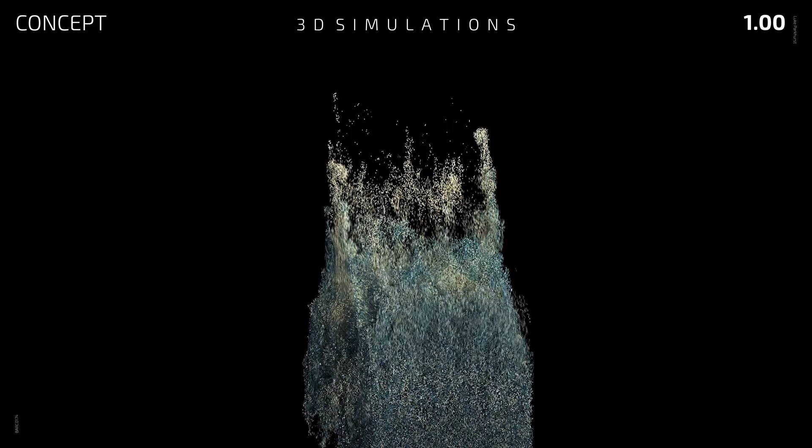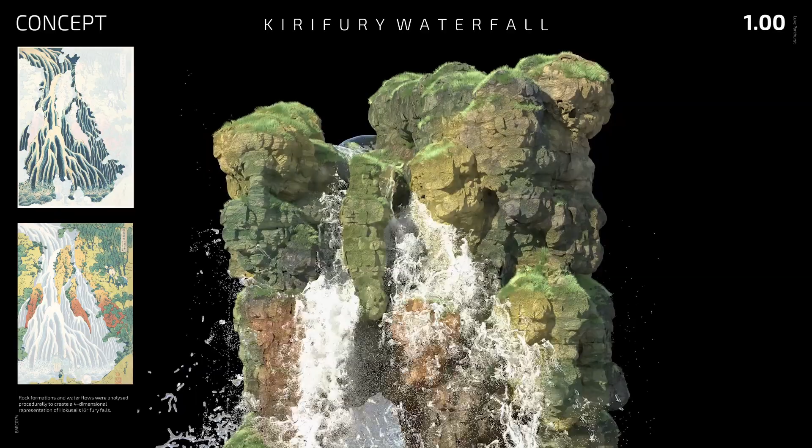The same parameters were used for the rock formations, with the addition of verticality and form. An algorithm was able to digitally grow rocks beneath the waterfalls. By combining the water simulations and rock growth, digital versions of the waterfalls could be created as 4-dimensional simulations with the addition of time, emulating Hokusai's experience during the creation of the paintings.

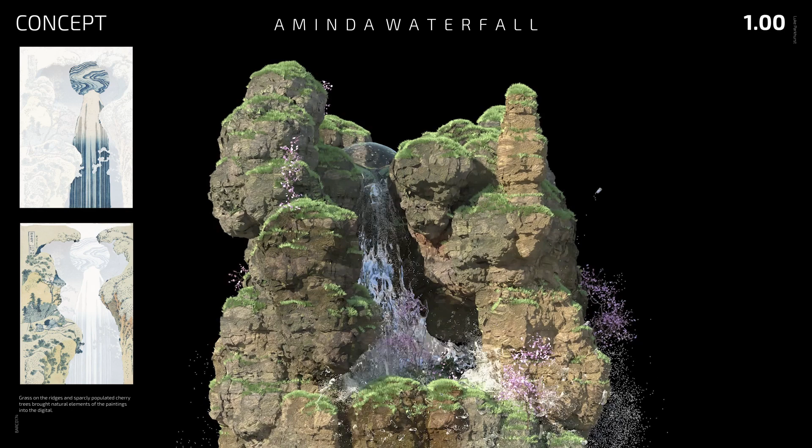Iterating through the different waterfalls produces unique procedural responses by the algorithms. In addition to this, each iteration exaggerates the amount of flora present in the scene until the final iteration, which is abstracted from the paintings. The creation of this virtual landscape mirrors Hokusai's expression through imagery and framing. Here, nature has been framed virtually.

In reality, the experience of nature produces a sense of calm, especially when forest bathing, the Japanese practice of spending time experiencing the sounds, smells, and visual stimulations of the forest. The project aims to address those addicted to the digital by introducing nature through the virtual frame and question whether it's possible to virtually forest bathe.

Research has shown that phytoncides, which are essential oils secreted into the air by forest flora and trees, are partially responsible for the calming effects of forest therapy. Phytoncides are plants' antimicrobial defense against pathogens, and when time is spent around phytoncide-emitting plants, they are inhaled and absorbed into the bloodstream, resulting in less cortisol in the blood, the hormone responsible for stress. One of the benefits of forest therapy is its rehabilitative uses for addictive tendencies.

In Tokyo, digital addiction is prevalent in internet cafés, partly because they provide a low-cost alternative to apartment living. However, spaces as small as 2 meters squared can worsen social isolation, depression, and anxiety. Access to the digital world has been typical of the internet cafe since its inception, allowing users to spend 24 hours a day in front of a monitor.

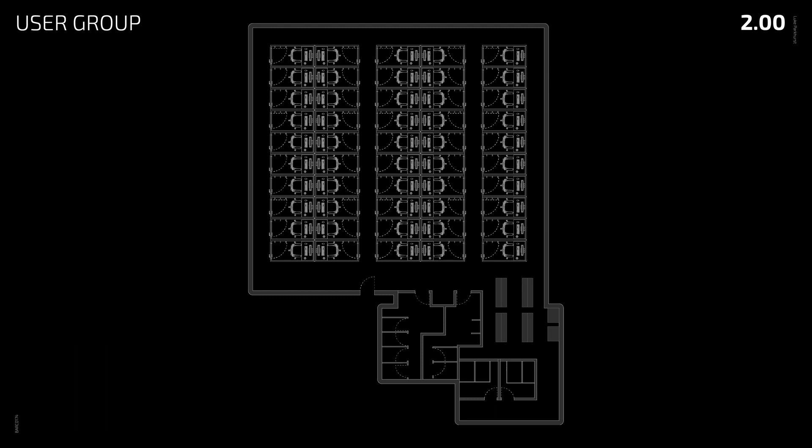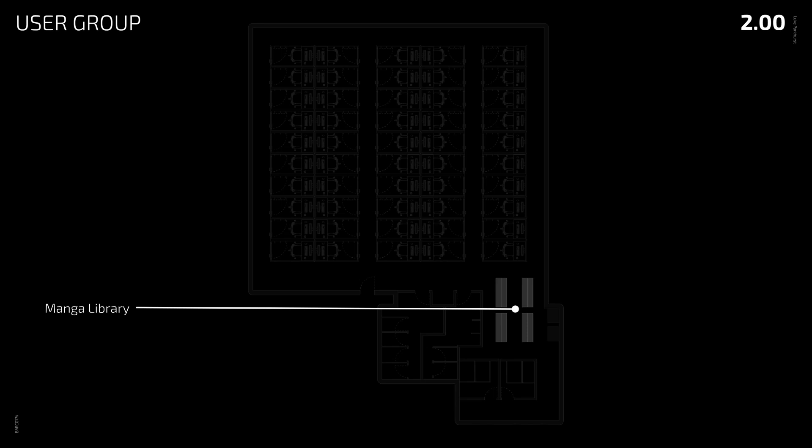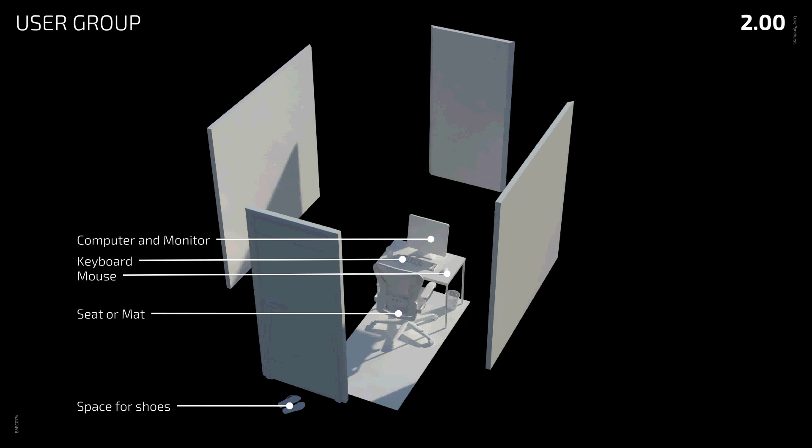Tokyo's internet cafes typically have amenities such as bathrooms, showers, vending machines, and a manga library, making it easy for users to stay at the internet cafe for prolonged periods of time. Each user is allocated a single pod which contains all the essential equipment to facilitate access to the digital world: a computer, mouse, keyboard, display, and basic seating, with many just providing a mat to sleep or sit on.

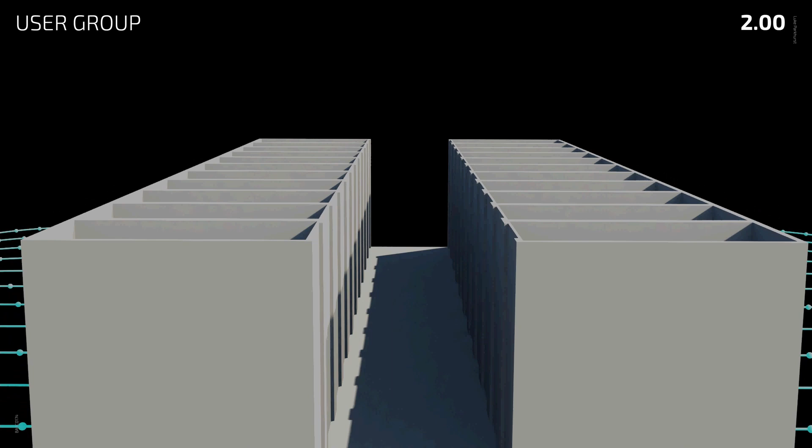Data from Tokyo Metropolitan Government surveys indicate that around 25% of those using Tokyo's internet cafes are homeless. A further 70% of this homeless population are in unstable employment, making it difficult to save money and find permanent residence. Therefore, the proposal must consider addressing both homelessness and digital addiction. With cafes providing the amenities required for the daily routines within the facility, users have no need to leave the building, the result being low frequencies of social interaction with connections only forming through digital mediums.

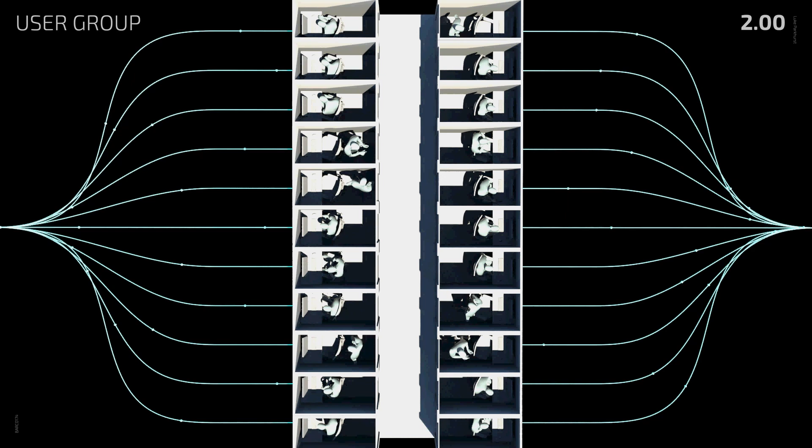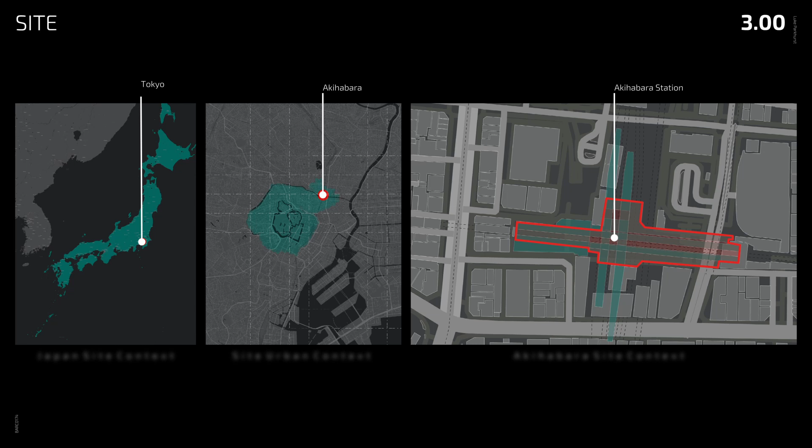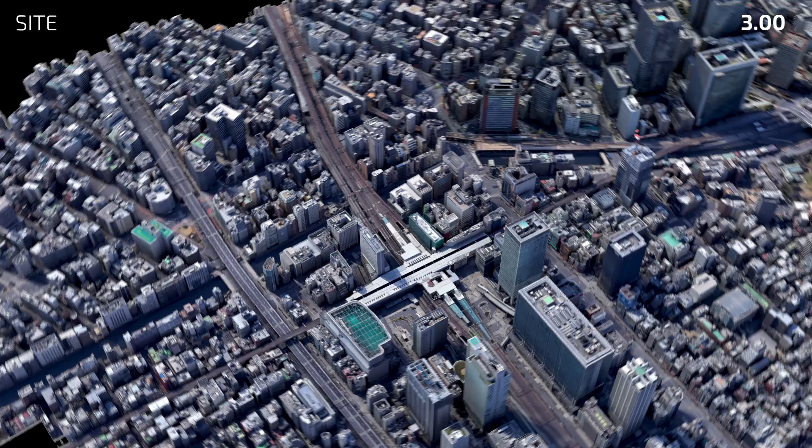The site is located above Akihabara Train Station in central Tokyo. The decision to build above the railway was influenced by several factors, the most prominent being the need for large expanses of horizontal space to design landscapes for forest therapy. Akihabara is also the digital centre of Tokyo, with many of the internet cafes located close by. From the research by Tokyo Metropolitan Government surveys, many of those staying at an internet cafe use it for its access to transport into central Tokyo. Therefore, building above the station must take this user group into consideration.

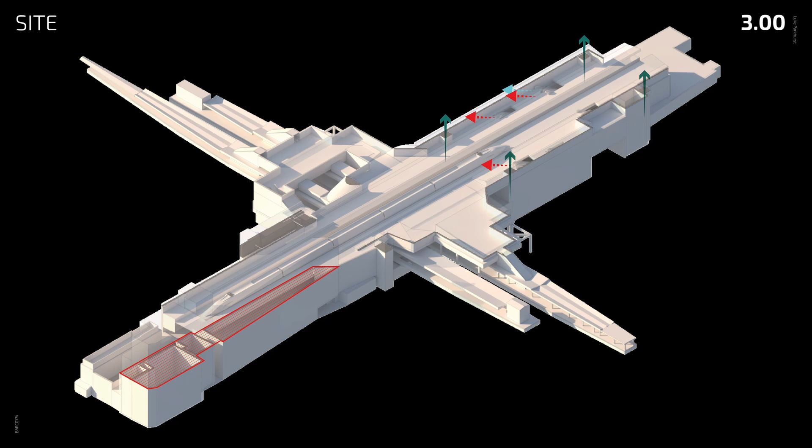The existing station has 2 main lines that overcross at first and second floor level, with access to both from the ground floor via escalators and lift cores. The project proposes removing the corrugated platform shelter at the second floor level and replacing it with the Japanese garden to the east and building to the west.

The building program addresses the 3 primary user groups: those that are addicted to the digital, those that are homeless, and those that are commuting through the station. The building will function as an extension to the landscape, giving users an experience similar to forest bathing when time is spent in the building. Hybridized homeless shelters and internet cafe pods are scattered throughout the landscape in groups of 3, the same as rock formations in Zen gardens.

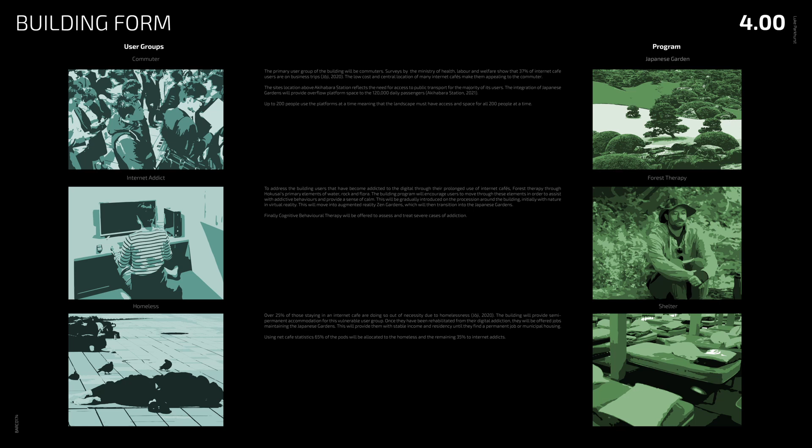These will become permanent places of residence for those that are addicted to the digital and those that are homeless. To be consistent with the format of the internet cafe, there will be pods containing essential amenities. The building also has retail spaces dedicated for commuters, which will be managed and operated by those living in the pod. Staircases on each side of the railway connect the platform to the landscape and building entrance.

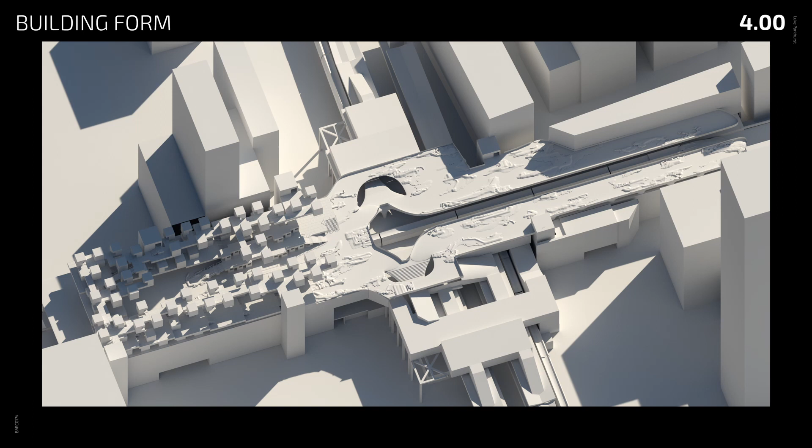The form of the building is defined by the stepped floor plates to simulate the undulating landscape of Japan. Retail, bathroom, and kitchen pods are introduced at ground floor level, with habitation pods stepping up on each floor plate. Pumice encases the pods and floor plates, providing a growing medium for plant life. To support the cantilevered mass of the pumice, a space frame connects each pod and lift core and supports the building.

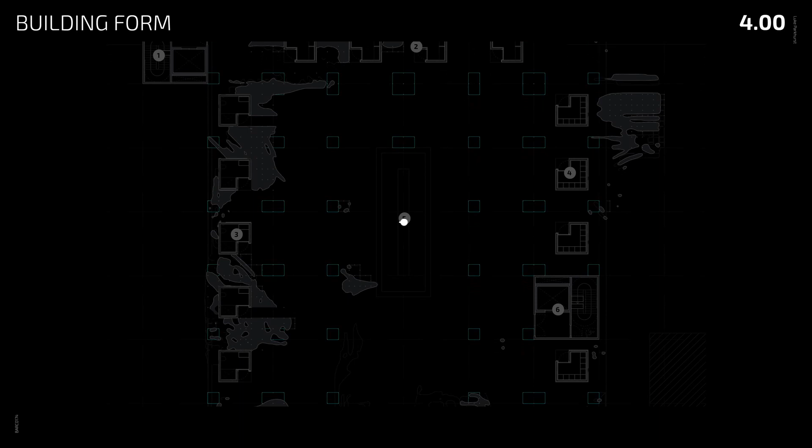The ground floor has a large atrium to the rear, which will predominantly be used by commuters. However, access to bathroom, kitchen, and library pods will be from this space, encouraging those living in the habitation pods above to walk down through the building as part of their daily routine. This gives cyber refugees who previously lived a sedentary lifestyle exercise and the possibility of social interactions as they move through the building.

The pumice facade enables ferns and other phytoncide-releasing plants to overgrow the building, providing the calming effects of forest therapy to the building users. To treat those heavily addicted to the digital, a gradual reduction in time spent in the virtual world is necessary to reduce the chances of returning to addictive behaviours.

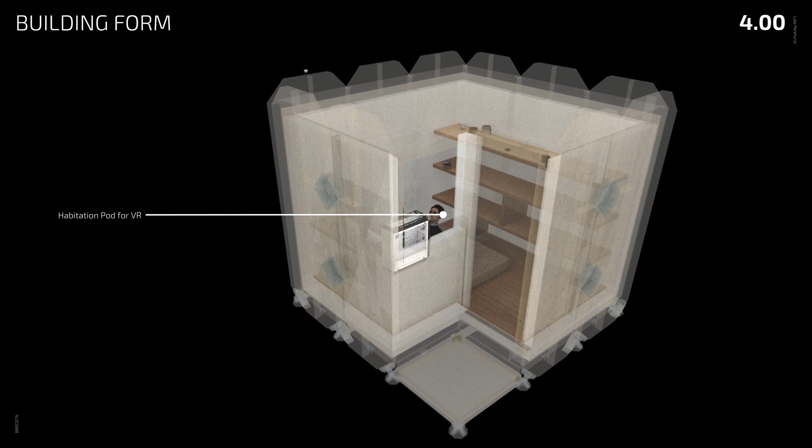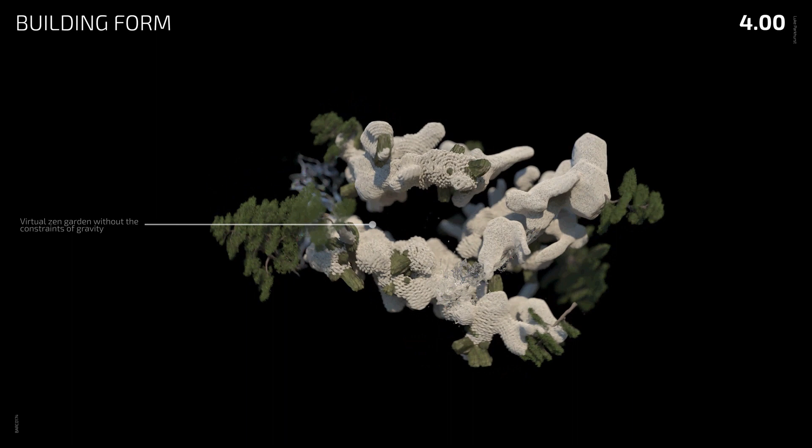To achieve this, Hokusai paintings will be used to treat the digital addiction with forest therapy. This will initially be in the virtual world using virtual reality goggles, which will then transition to experiencing nature through augmented reality, and finally, the building will provide forest therapy in the real world.

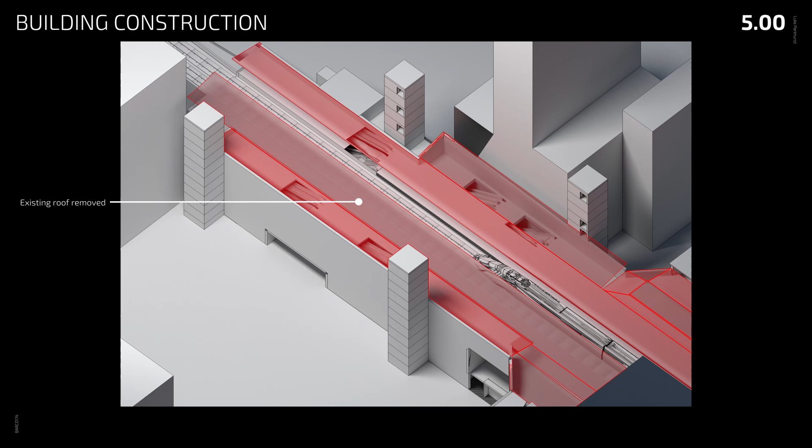A modular building typology was adopted to ensure that the function of the train station was not affected throughout construction. The use of mobile cranes will help to mitigate the vibrations from the station. Once the existing roof has been removed, prefabricated concrete columns are lifted onto existing column heads of the station. The new columns support the Japanese landscape and proposed building pods. These pods also link both sides of the existing platform to the proposal.

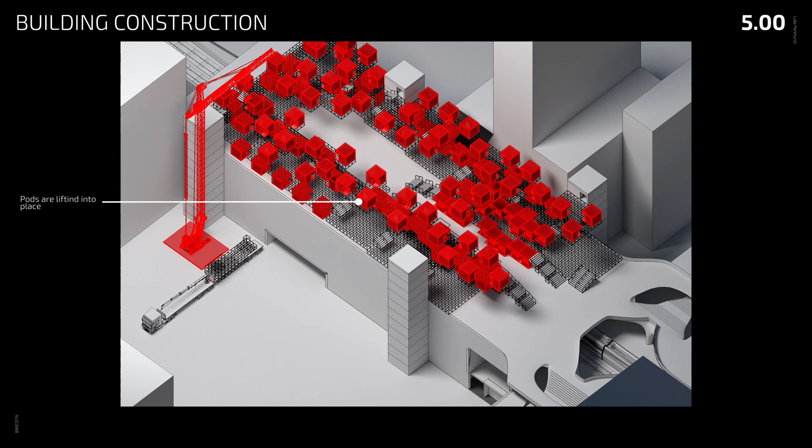The next stage of the construction is the cross-laminated timber pods and timber space frame, which structurally complement each other. The pods connect to the space frame via steel connection plates. This laterally reinforces the space frame, omitting the need for cross-bracing. Pumice was chosen for the building for its performative and porous qualities, as well as having a visual relationship to the rocks in Hokusai paintings.

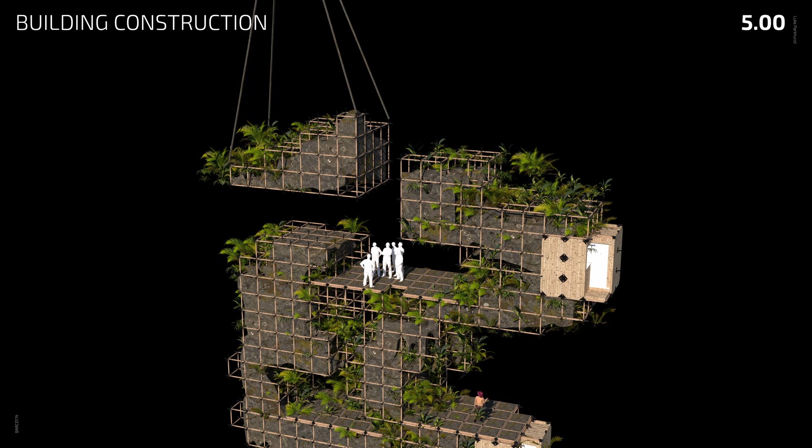Due to its porosity, it is lightweight and can retain water, allowing species of plants such as ferns and umbrella plants to grow hydroponically. Another advantage of pumice is that it can be locally sourced from mines around Tokyo, reducing the carbon footprint of the building.

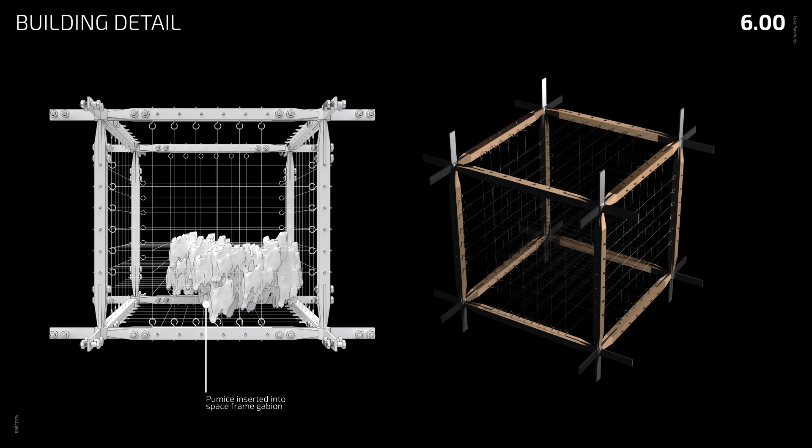To build the pumice facade, parts of the space frame become gabions with wire cables drilled into the timber. The material is placed on the grid of wires. This is then left to cure. This process is repeated until the gabion is filled. Encasing the wires in pumice strengthens the space frame with the tension created by its own weight.

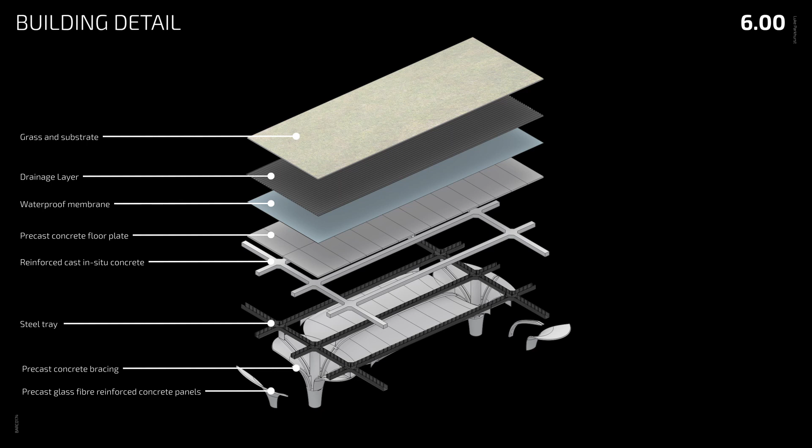To support the weight of the new proposal, the existing station columns must be reinforced and extended. The proposed prefabricated support structure for the building attaches to these column heads, providing a flat pad to lift the pods onto. The habitation pods are 3 meters cubed, which provides more space than the internet cafe pod. This will also allow pods to connect to the 1 meter space frame at any point.

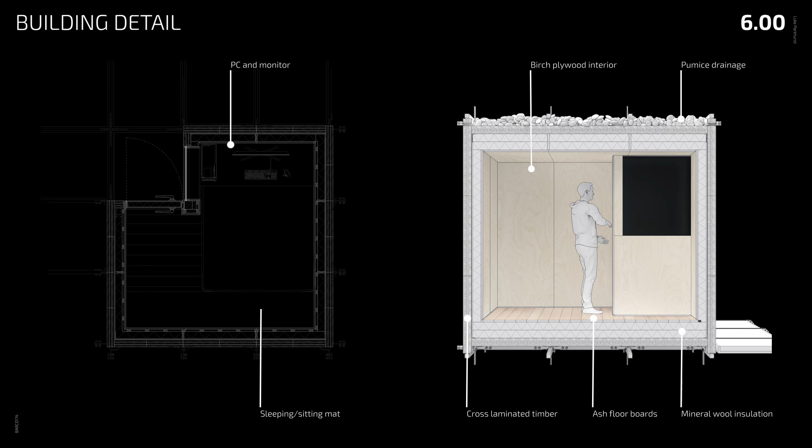Due to the CLT external frame, each face of the pod can provide structural support to the building system. This enables the pod to be walked on, used as a lateral strength reinforcement, or used as a foundation pad for the structure above. Each pod will come equipped with a high-performance computer and monitor. This will give cyber refugees access to the digital world and will enable them to access nature therapy through virtual reality.

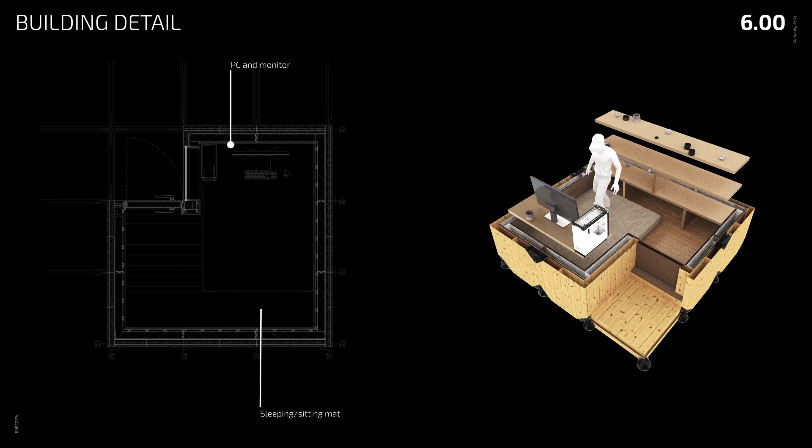To explore how the dynamic of Tokyo's micro-living culture will evolve in the years to come, the building proposal expands to include a more integrated urban proposal. The purpose of this expansion is to present an alternative to the dense concrete and glass apartments currently found throughout Tokyo. The performative qualities of the pumice will also help to improve air quality in Akihabara, as well as reducing noise pollution from the roads and railway.

At the top of the proposal, a Zen garden gives those walking up the building respite and a chance to meditate after forest bathing throughout the building.